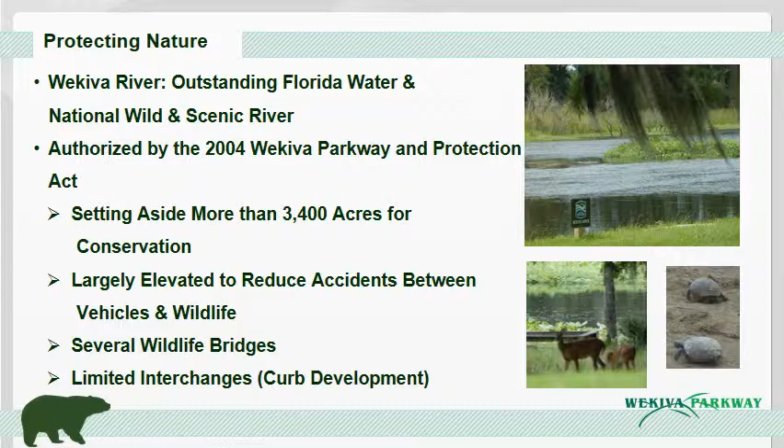The parkway will have a minimal number of interchanges. The idea is to reduce the amount of related development in this environmentally sensitive area.

The parkway is a regional transportation solution, and it is also going to have a significant impact on the area economy. Using Federal Highway Administration formulas, we estimate the project will create more than 35,000 jobs during design and construction.

The landmark Wekiva Parkway has been 30 years in the making. This evening's public meeting is just the latest in a long series of opportunities for the public to review and provide feedback on project details.

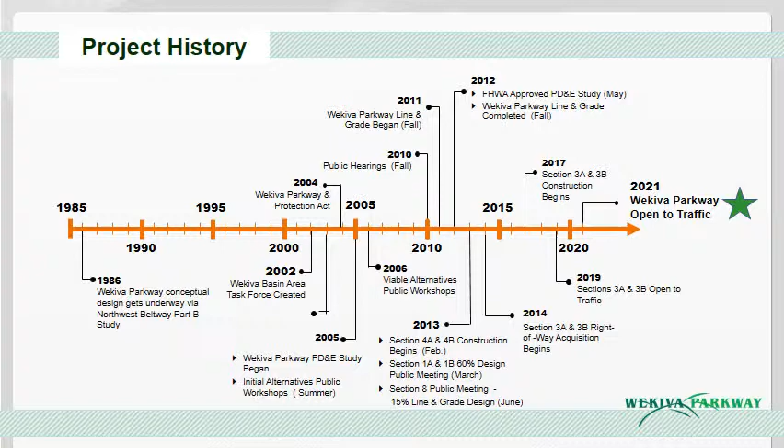Construction on the first sections, 4A and 4B, is underway and is expected to finish by late 2014. All of the project sections should be built and open to traffic by the end of 2021.

The focus of tonight's meeting is to review the preliminary designs for Wekiva Parkway Sections 3A and 3B. Some things have changed since the previous concepts were presented during the PD&E study public hearings in 2010.

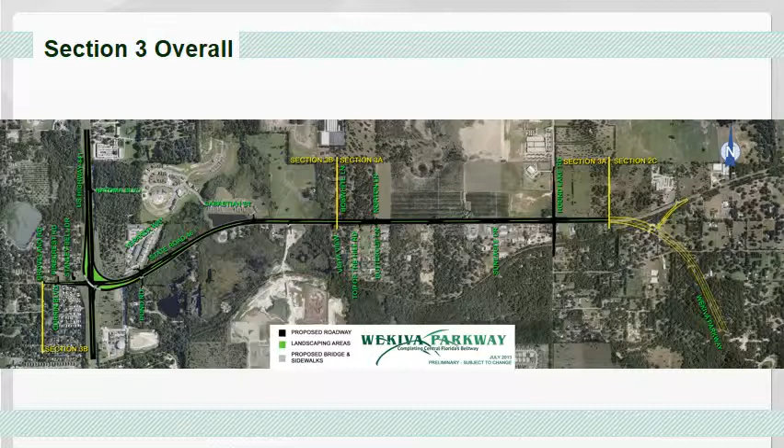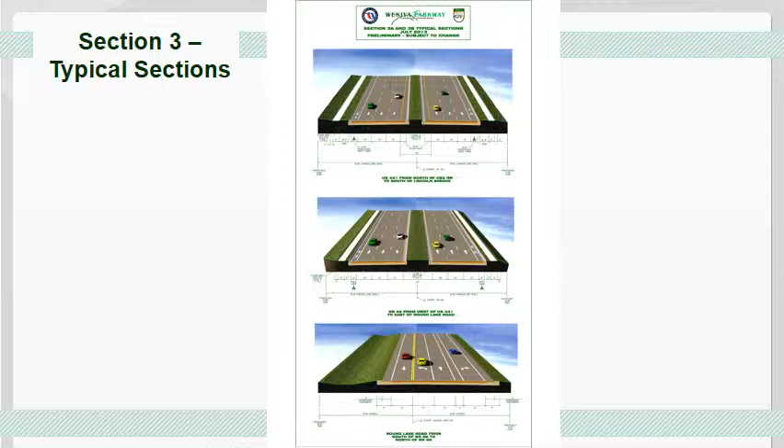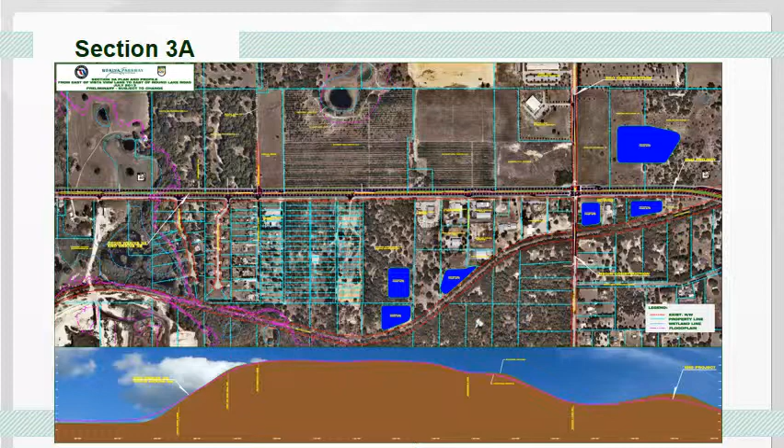Some of the proposed locations for retention ponds on Section 3A changed from the PD&E study to the 15% line and grade design. As part of the recently begun final design process, the department is considering these latest locations for potential retention pond sites. These water retention areas are part of the drainage design to fulfill permitting requirements mandated by the Florida Department of Environmental Protection and the St. Johns River Water Management District.

The FDOT has been soliciting feedback from property owners on these proposed pond sites. Comments also can be provided at tonight's meeting via the available comment forms.

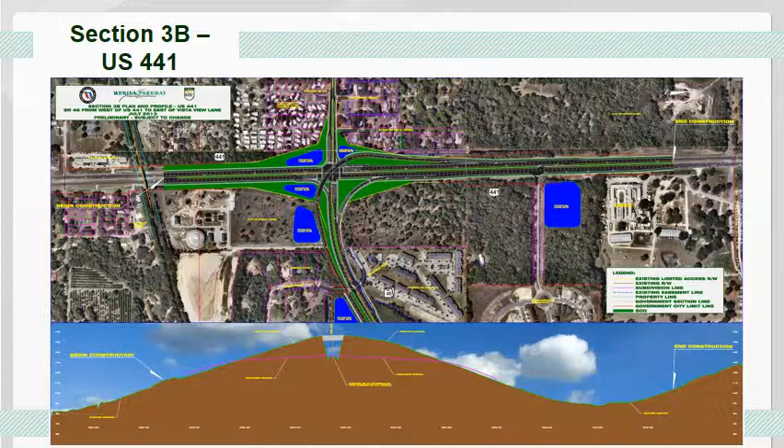The department has been coordinating extensively with City of Mount Dora officials and community members on Section 3B. Improvements to the portion of State Road 46 will include sidewalks and turn lanes for people trying to get into their communities. The following video gives an idea of the look and traffic flow for the new interchange.

Aspects of the project continue to be refined as design progresses.